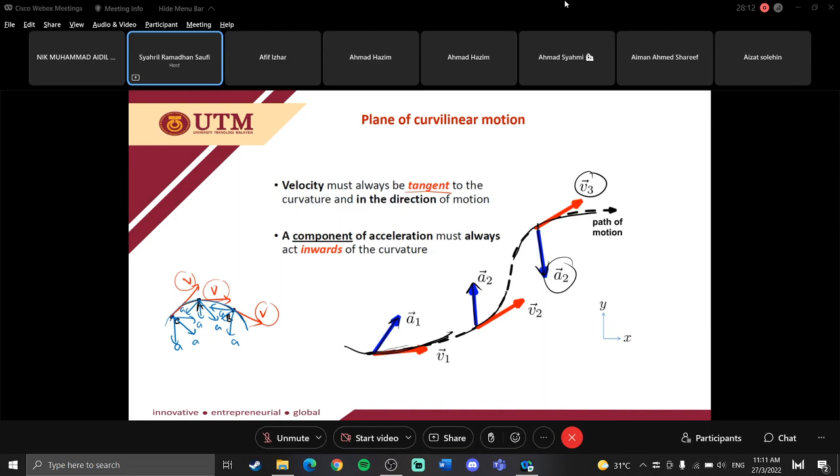All right, so in this chapter, you have three types of analysis that can be done when we have a projectile motion or a curvilinear motion. The first method is rectangular coordinates, which uses the x and y axis with respect to the reference point at the origin.

So let's say when you throw something from point A to point B. That means you have a reference point, from point A to point B, point A will be your reference point. So you will measure what is the distance, what is the velocity at A, and what is the velocity at B.

So this is the parameter you need to determine, based on the reference point. This is rectangular coordinates, x and y. Then you will have other methods called normal or tangential coordinates. For normal and tangential coordinates, we will do the analysis specifically on the particle itself, there is no reference point. The analysis involves the particle itself.

For rectangular coordinates, this is our particle, so we will refer to, for this example, the origin. Sometimes in a real case, we will refer to the initial point, let's say from point A to point B, so our reference point becomes point A. So this is for rectangular coordinates.

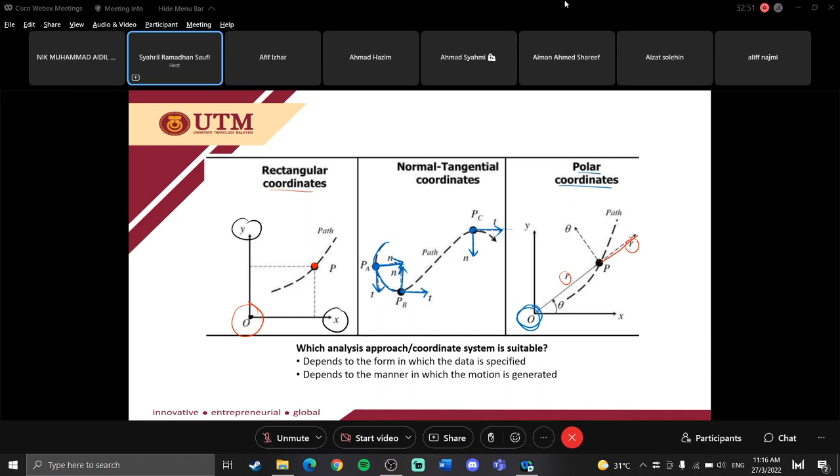So for r, this axis is always outward from this r, so this is the positive direction. Please remember, when we deal with velocity, when we deal with acceleration, these are vector parameters, so you will have magnitude and direction. That's why the direction is important.

For this r polar coordinate, you need to draw the r and theta axis based on the reference point, on the particle, but in order to draw r and theta you should refer to this reference point. For r, it is always outward. Usually in the question or problem, it will provide you what the r is from the reference point to the particle, so you know that will be your r, and you just draw the outward line to represent the positive axis of r, always outward from the particle.

And then for the next axis is theta. How to determine this theta is based on the direction. For this case, the theta is in this direction, so the positive theta axis should follow the same direction. So any parameter that follows this theta axis will become positive.

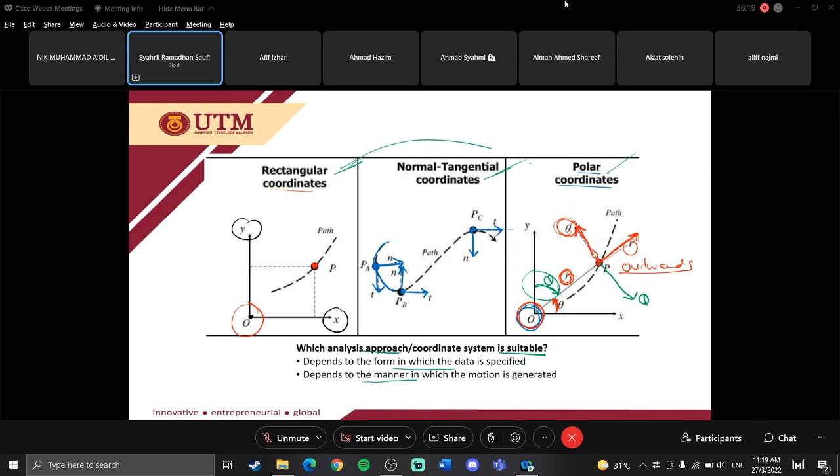This is the combination analysis. In one analysis, sometimes we combine problems, either from rectangular coordinates with normal and tangential coordinates, or a combination of rectangular with polar coordinates, or a combination of normal and tangential coordinate with polar coordinate. So in one problem you will have two analyses that you need to do, sometimes two or three together.

In rectilinear motion, you learned that velocity is a rate of change of displacement, which is ds over dt, and acceleration is a rate of change of velocity, which is dv over dt. We still refer to this displacement, velocity, and acceleration. The concept is still the same.

If we refer to this example, this is your particle at this position. For this particle, you can do x and y analysis, which has its own equations. NT analysis has another equation, and R-theta analysis has another equation. So each specific method will have its own equations that you need to understand and remember.

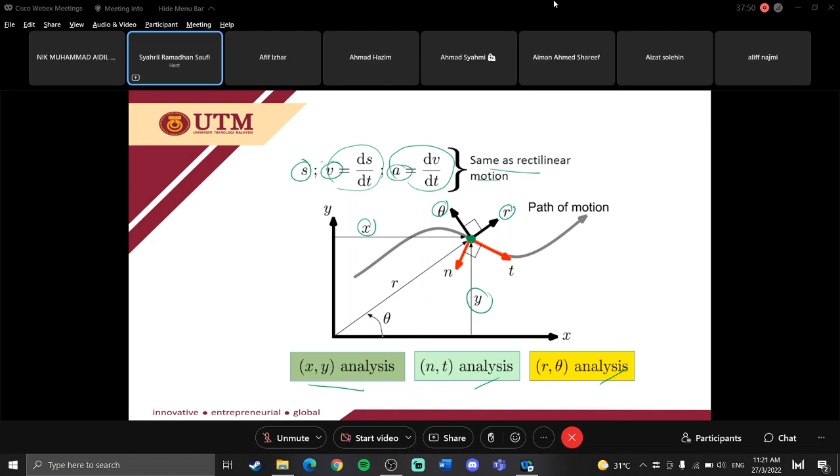If you notice here on theta and r, since the direction of theta is into this direction, the axis of theta follows the direction of this angle. This is your r, so in order to draw the axis r, just go outward from the particle. For the NT analysis, at this position, this is your curve, so tangent to the curve is your T, and inward to the curve is your N. Please remember that. This is how to determine the direction and draw the axis at the certain position of the particle.

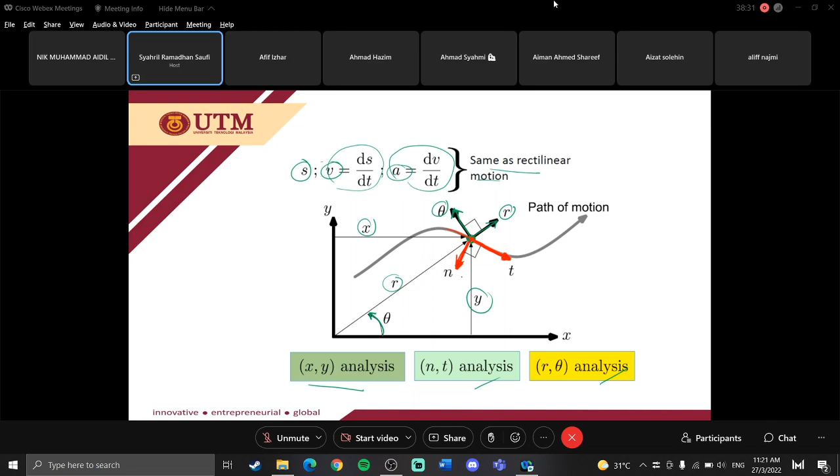So we go first on XY analysis. For XY analysis, the typical problem is a projectile, sometimes when we throw a ball from reference point A to point B, we call this a projectile. As I mentioned previously, XY analysis will have an equation along the X axis and an equation along the Y axis. I believe if you look at this equation, most of you are familiar with it, since you learned this previously in secondary school.

For the projectile problems or XY analysis, normally only gravitational acceleration g is considered. For the acceleration we only consider gravitational acceleration, so please remember that. So g is a constant acceleration along the y axis, this is the value of acceleration g. Meaning that on this particular equation for the y axis, this ay here is equal to g.

In independent analysis for x and y axis, solutions for both axes are related through time. What we can relate from the y and x axis is the time, the time taken along y and x should be the same. So when you want to do the analysis, if you want to relate the motion of the particle, you can relate y and x axis in terms of its time, so you can relate these equations together. Sometimes you need to use this equation in order to determine a parameter, let's say the displacement or velocity.

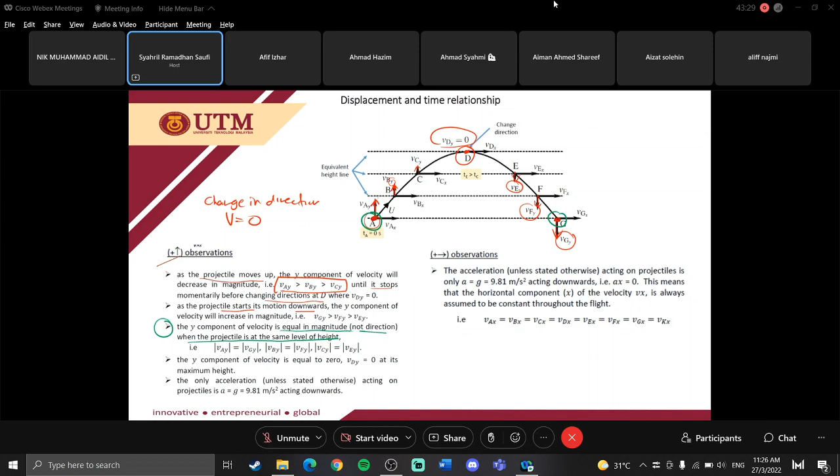So what relationship can we get here? The third point is that the y component of velocity is equal in magnitude, not direction, when the projectile is at the same level of height. What is meant here? At point A and point G, there is the same height, so VAY will be equal to VGY in magnitude, not direction. As mentioned, the magnitude of VAY equals the magnitude of VGY, that's why we put it in modulus form, because we just want the magnitude, which is the same, but not the direction.

So at this position, the velocity VBY and the velocity VFY have the same magnitude. Same goes for VCY and VEY, the magnitude is the same. You may notice that velocity VCY and VEY is the same, but the direction is different, and the time here is also different.

So there is a relationship you can make here: at the same height, there is a difference in time between two points, but the velocity magnitude is the same. You need this information when doing the analysis. Let's say at this height you have the same velocity magnitude but different time between the two points. This information is needed after this.

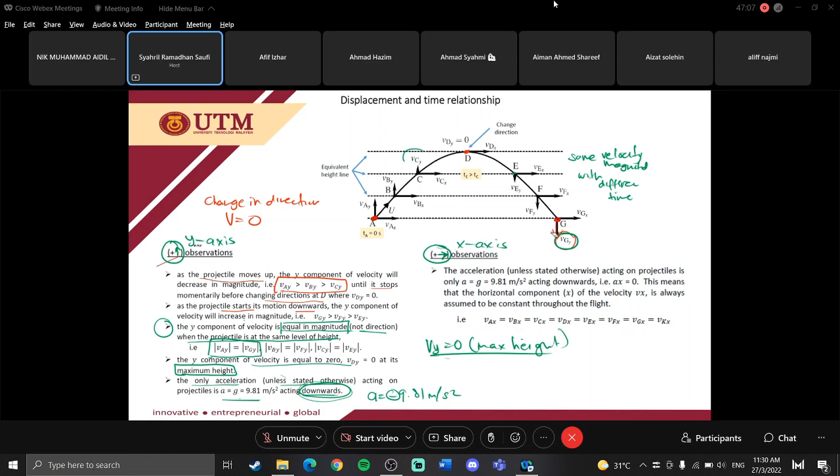Alright, so when we go along x, you will notice that VAX, VBX, VCX, VDX, VEX, VFX, and VGX are all the same. You may notice that the velocity along x is always the same from start to end. That's why, since the velocity along x is constant throughout the flight of the projectile motion, the velocity is constant.

That's why acceleration along x is 0. If you refer to this axis, there is no acceleration along the x-axis because we assume that throughout the projectile motion, the velocity is constant, so you don't have acceleration along the x-axis. The acceleration acting on the projectile is only acting downward, so ax is equal to 0. This means the horizontal component of velocity vx is always assumed to be constant throughout the flight.

So this is the information you need when you deal with projectile motion. This is the information that you need to understand. So any questions so far?

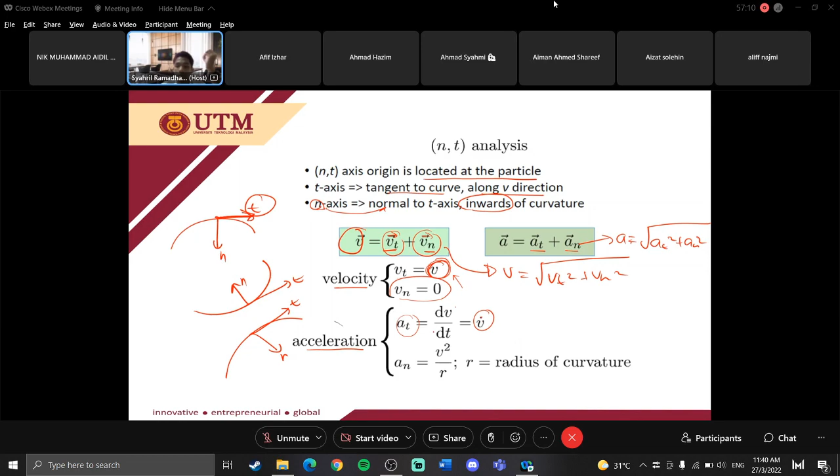Then there's another acceleration related to the normal axis, which is the normal acceleration. This normal acceleration is also related to v, but with the radius of curvature. Because normal refers to the curvature shape and is always inward, you need to consider the radius of curvature along with the velocity.

You know that velocity is in meters per second, so velocity squared gives meters squared per second squared. Since the normal acceleration is velocity squared over radius of curvature, and radius is in meters, you get meters squared per second squared per meter — you cancel out one meter, leaving meters per second squared, which is the unit of acceleration.

So usually you can check whether it makes sense in terms of its unit. Here you get the unit meters per second squared.

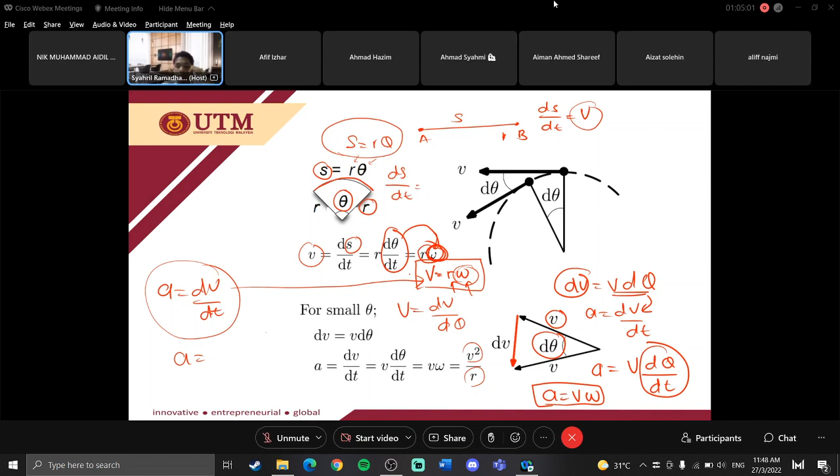So then we know that A is equal to dv over dt. We substitute dv, this v d theta, into this equation. So we have A equal to v d theta over dt. D theta over dt is actually omega. So A is equal to v omega. This is the relationship you obtain. So since v equal to r omega, omega is equal to v over r. You substitute omega into this equation, then you get A is equal to v times v over r, that's why you get this equation, v squared over r.

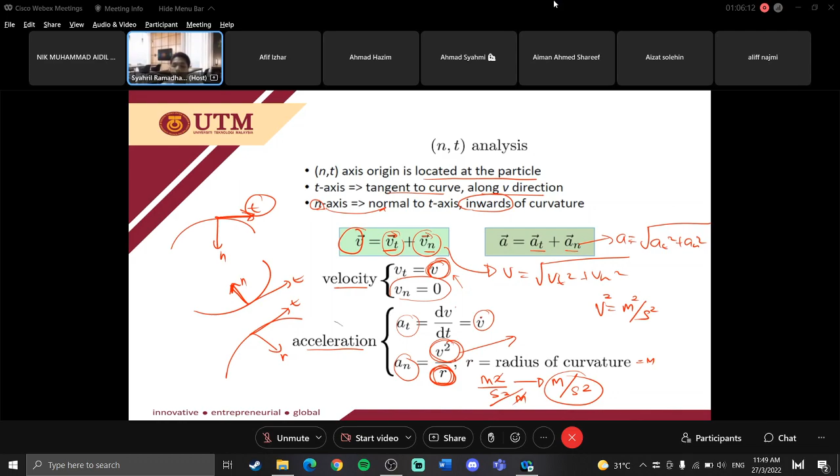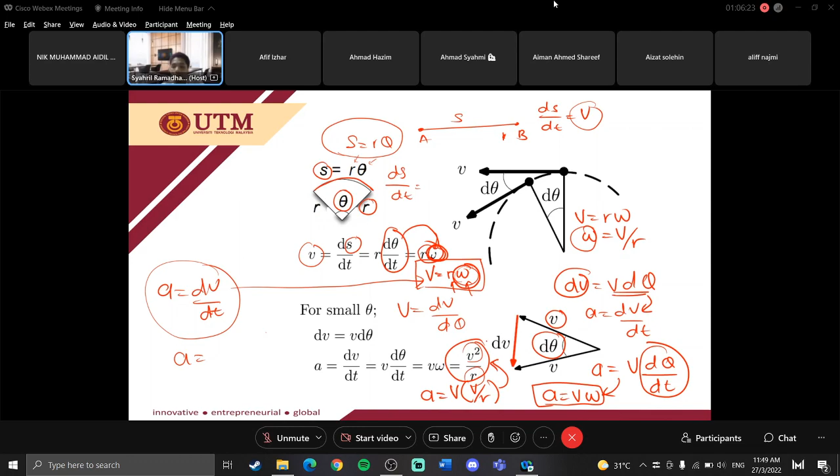This is the equation of normal acceleration. You can refer to this slide for how to get v squared over r — the derivation of velocity and acceleration when the particle moves in curvilinear motion. But the derivation is not included in your test. You just need to remember the equations: vt equal to v, vn equal to 0, at equal to dv over dt, and an equal to v squared over r. So in a question or problem, you need to understand only this equation. I just provided the extra knowledge on how to get the acceleration when the particle moves in curvilinear motion.

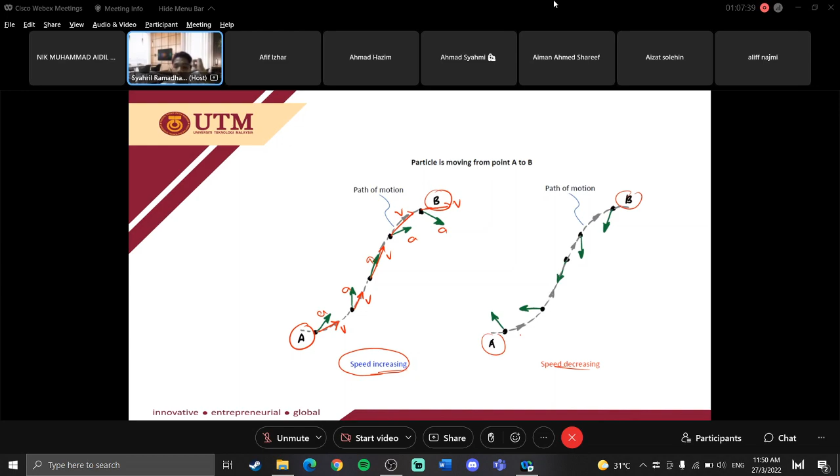Okay, for the speed decreasing, you have A to B. This is the direction of motion, V. You may notice that the acceleration is in the opposite direction, preferring the opposite direction of the motion. So we can say that the speed is decreasing, or deceleration.

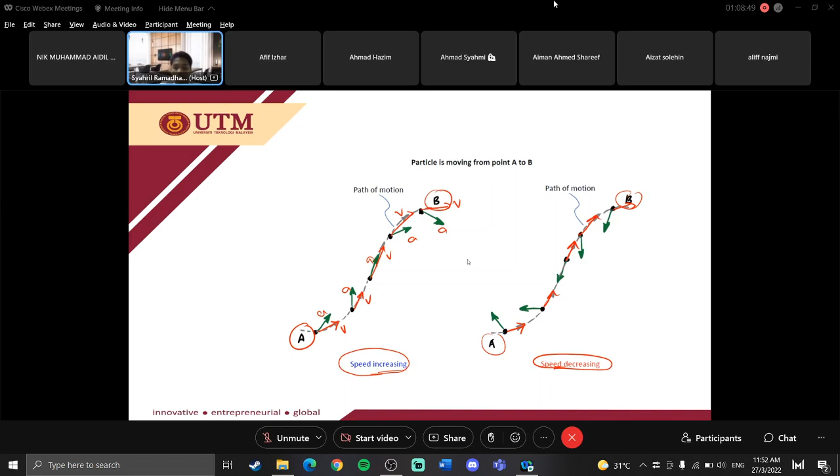Let's say when you're watching a bird moving in the sky, flying in the sky, you yourself are the reference point, and you're looking to the bird. So the distance from you to the bird is your r, and the motion of the bird is based on this theta direction. If you look from x to this r, then your positive axis should be this direction, and the positive axis for r should always be outward from this point, sentiasa terkeluar daripada particle, for positive direction.

So for R and theta analysis, you will have another set of parameters: V theta, VR, A theta, AR, that need to be defined.

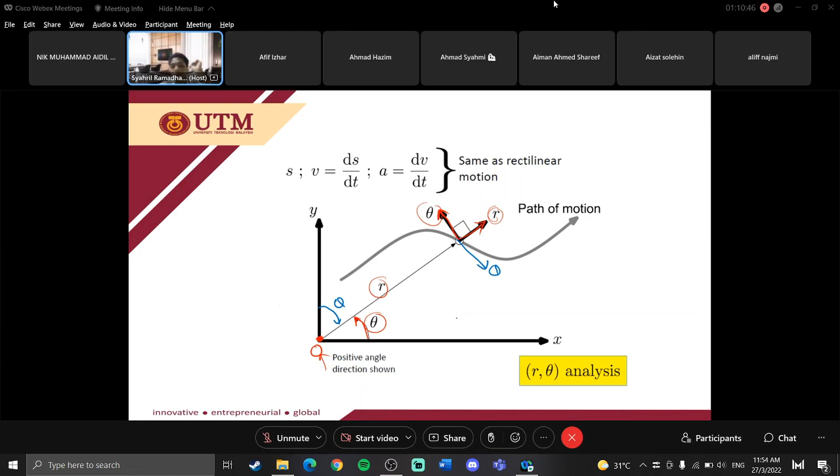As I mentioned previously, if theta is given like this, then this should be the direction, so the positive theta axis should be this direction. Please make sure when you draw the axis you follow the correct direction, because it will represent the positive and negative direction of the velocity and acceleration.

Alright, so this is the equation that you need to remember for r theta analysis. The r theta axis has its origin located somewhere from the particle, and the r axis goes from origin in the radial direction to the particle, with theta normal to the r axis, positive along positive theta. What is meant by normal to r axis is that r and theta are always perpendicular, just like n and t axis are always perpendicular at 90 degrees, and x and y axis are always perpendicular at 90 degrees.

So for velocity, you can determine the velocity of the particle by using Vr plus V theta. Please remember, this is a vector, you cannot add it up directly. You need to use vector analysis: Vr squared plus V theta squared, square root, then you will get V.

Same goes for acceleration. Acceleration can be found using Ar plus A theta: ar squared plus a theta squared, square root, then you get the total acceleration a. So vr is equal to r dot, v theta is equal to r theta dot, ar is equal to r double dot minus r theta dot squared, and a theta is equal to r theta double dot plus 2 r dot theta dot.

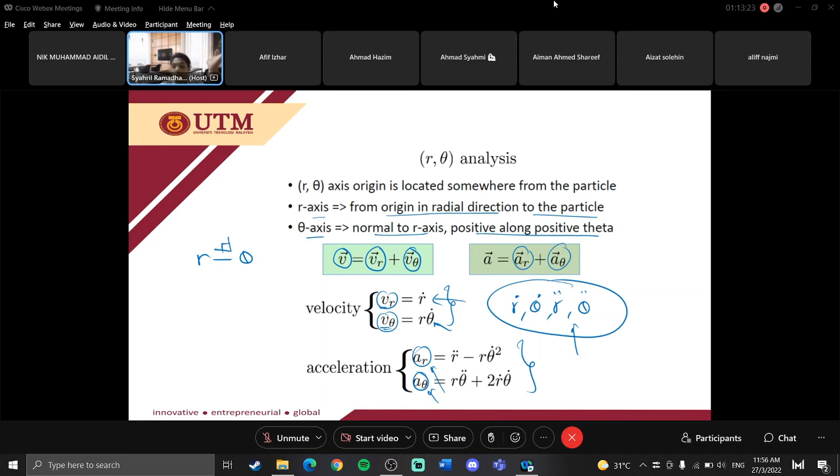Okay, so that's all for the information for this chapter. Then we can move on to the examples and exercises. So for now, any question? Ada soalan ke?

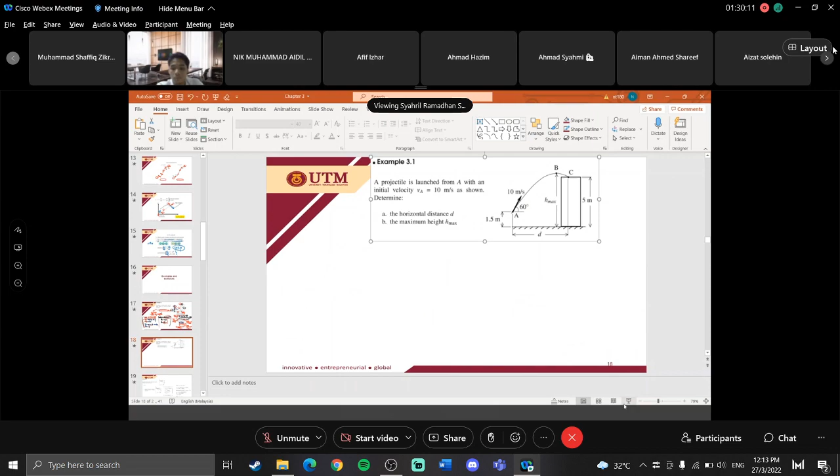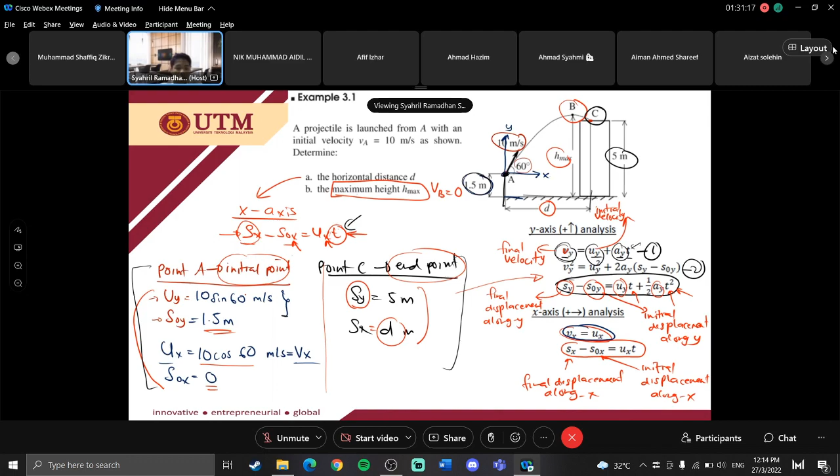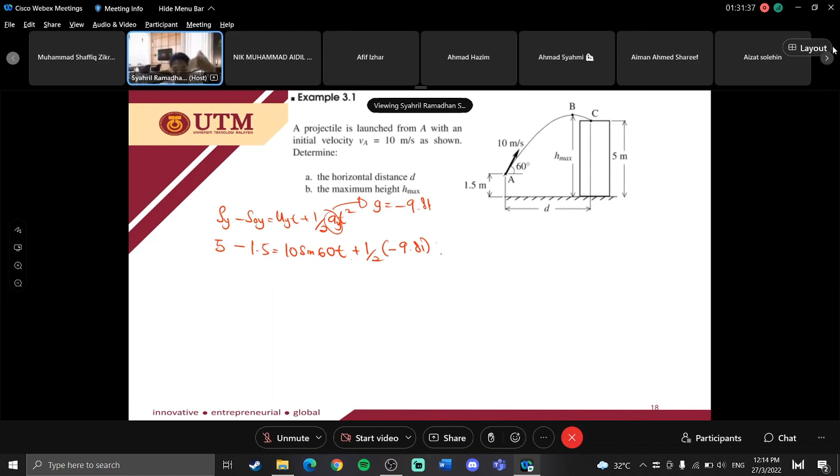So let me write the equation: Sy minus S naught y equals Uy t plus half a t squared. Sy is 5, S naught y is 1.5, equal to Uy which is 10 sine 60, times t, plus half times Ay — which is actually g, and since g is directed downward, it's negative 9.81 — times t squared.

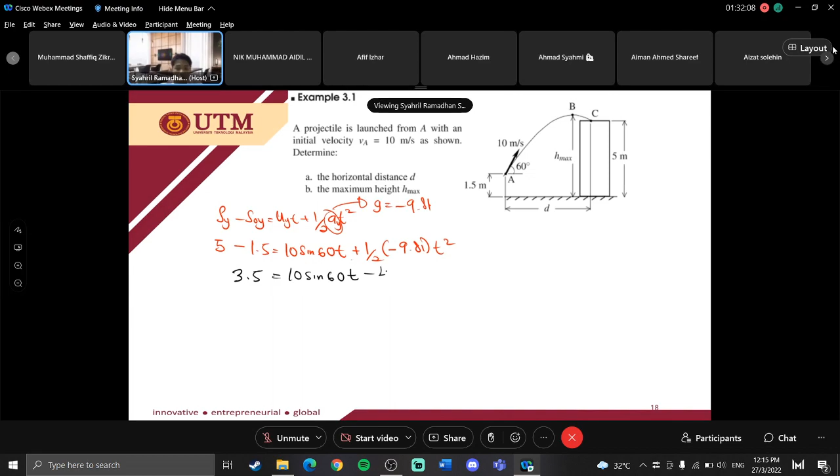So this is the equation that you need to use to determine the time. You have 3.5 equals 10 sine 60 t minus 4.905 t squared. Rearranging this equation, you get 4.905 t squared minus 10 sine 60 t plus 3.5 equals 0. So you have this quadratic equation, and from it you can determine the times t1 and t2.

Alright, so let me copy the solution from the books first.

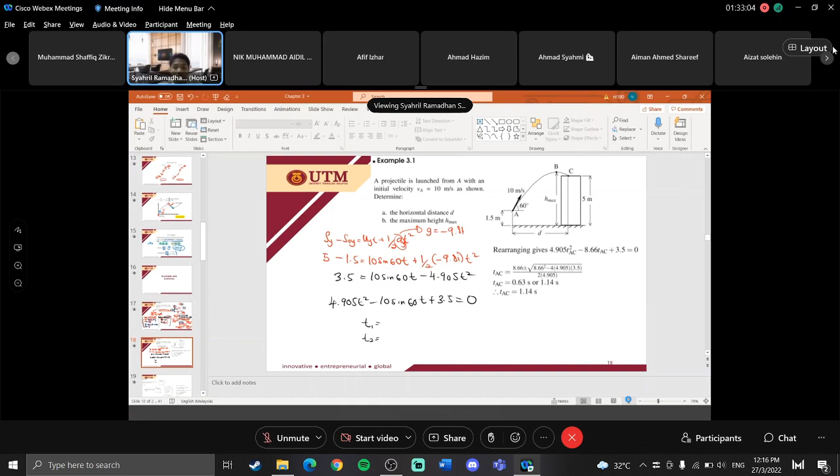Okay, for those not familiar with the quadratic equation, you can refer to this solution. For those who know how to use the calculator, you can use the calculator and directly get the time. You click mode, then equation, then 2nd degree.

As from the books, it uses this solution. You rearrange the equation and put it in this formula. You will get the time 0.63 and 1.14 seconds. So you get two positive values for the time.

So the question asks the horizontal distance, meaning the distance at point C, from point A to point C. So my question is, why in the book do they choose 1.14 seconds?

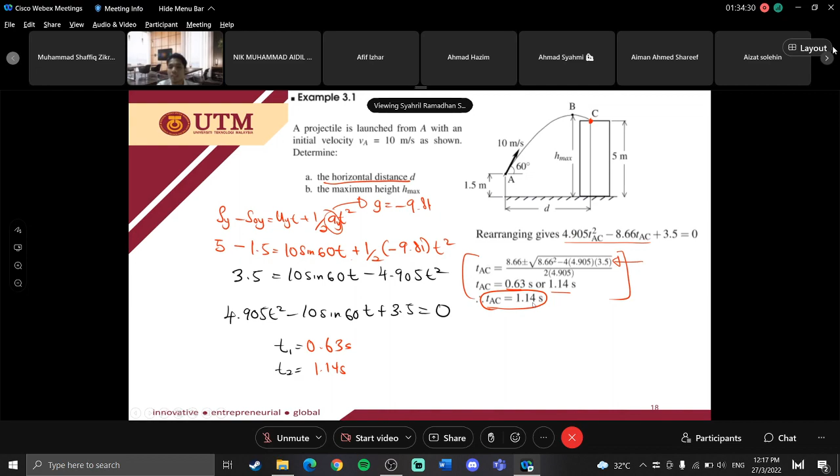Anyone want to try? Why do they choose 1.14 seconds? Because it's the time at C, sir. Because the time at... So 0.63, where is the location? Is it because it is at the same height, sir? Same height?

Oh, okay, I think I understand your answer. If you are at this point, there is another point on the same height as C. So if I extend the line from this point, this is the other point that has the same height as C. Let's call it point D. So point D and point C are actually the same height.

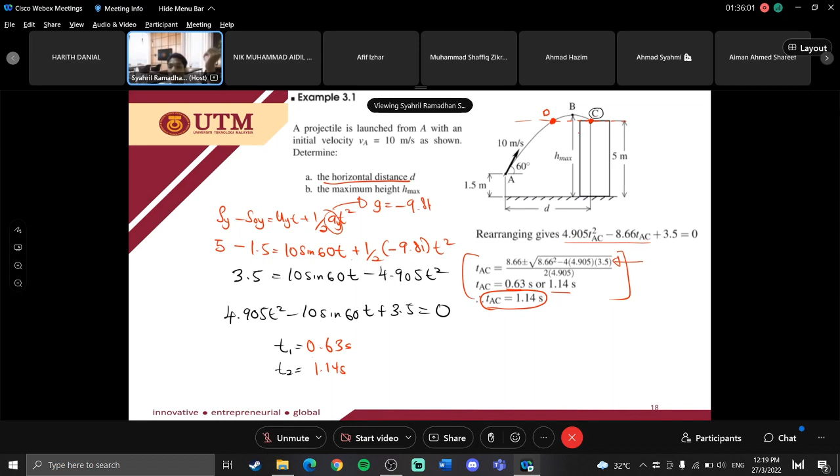Same height means the same velocity magnitude, but a different time, since same height but different location gives a different time. So that's why here you have 0.63 and 1.14. You have a curve like this, where point D is at 0.63 and point C is at 1.14 seconds. This is the implication of the times I mentioned previously.

If you notice, when the point passes the maximum height, you need to choose the higher time. If the point is less than the maximum height, you choose the lower time. This is based on the curve I showed on the displacement-time relationship.

So now you know that at point C, the time is 1.14 seconds. So you have the x-axis equation: Sx minus S naught x equals uxt. This is the x-axis equation because we want the horizontal distance, which is based on the x-axis. Sx is unknown, S naught x is 0, so Sx equals ux times t, where ux is 10 cos 60, times the time, which is 1.14 seconds. Then you get the distance.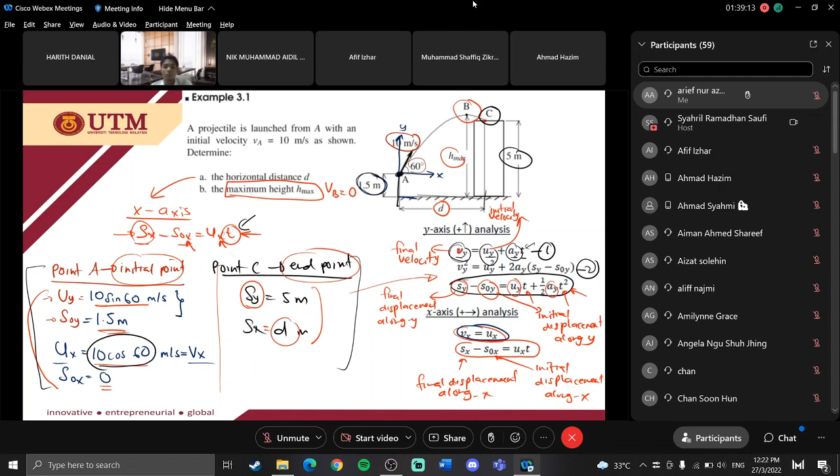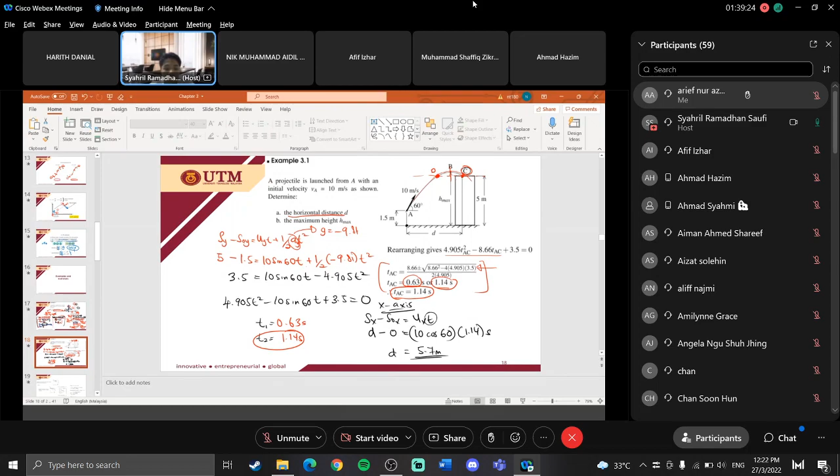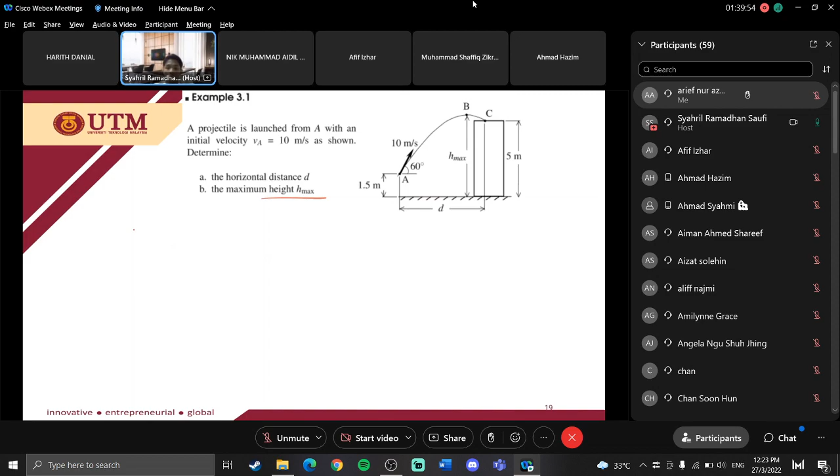Okay, so then we go on to question B. I think I need an extra space. All right, so we go on to question B now. The question asks for Hmax, which is along Y. So since it's along Y, you need to use the equation along Y. Let me copy this one.

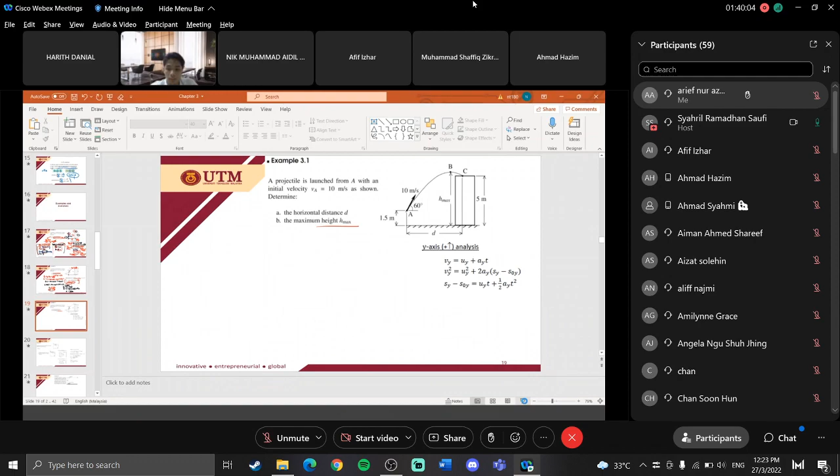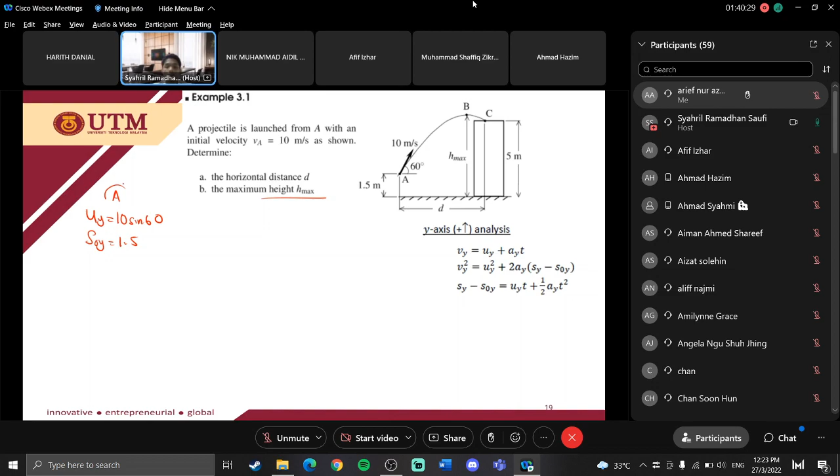Right, this is the equation along Y. So you have Uy equal to 10 sine 60, and S naught Y equal to 1.5. This is for the initial point A. Now, since question B asks for maximum height at point B, point B will become your endpoint, while this is the initial point. Since it's maximum height, you know Vy at point B should be equal to 0.

Anyone? No, sir. Why? Because we can use equation 2. We don't need the time. Yes, correct, we can use equation number 2 because we don't need the time. We have the equation of Sy and S naught Y, and Ay we know because it's constant, and Uy squared we know, Vy squared is 0, so you can use this equation.

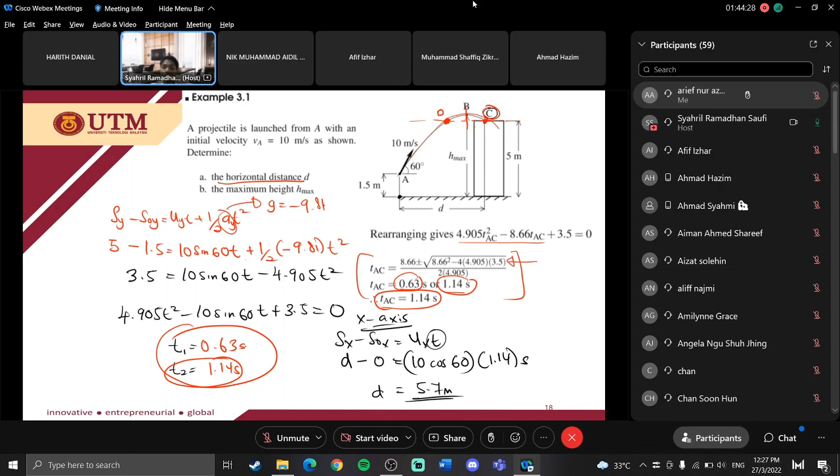If you can relate, usually we need to determine the time. One important thing here is when you get the time, you will get two times, t1 and t2, so which time do you need to use. Usually for the projectile it's just like that, playing around with this kind of equation. I think that's it for example 3.1.

So I want to go with example 3.2. You may notice that in this example, point A starts above point B. So referring back to the previous slide on the implication of time, you may notice that if you have information like this, when you calculate the time, you will get one positive time and one negative time. So you need to choose the positive one.

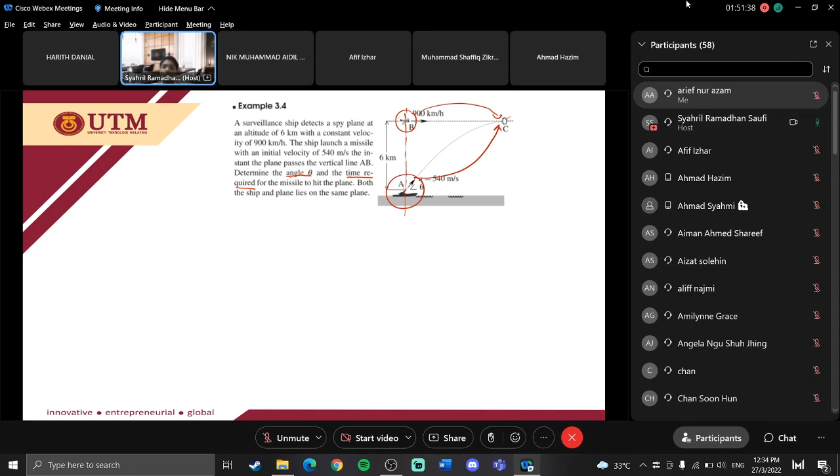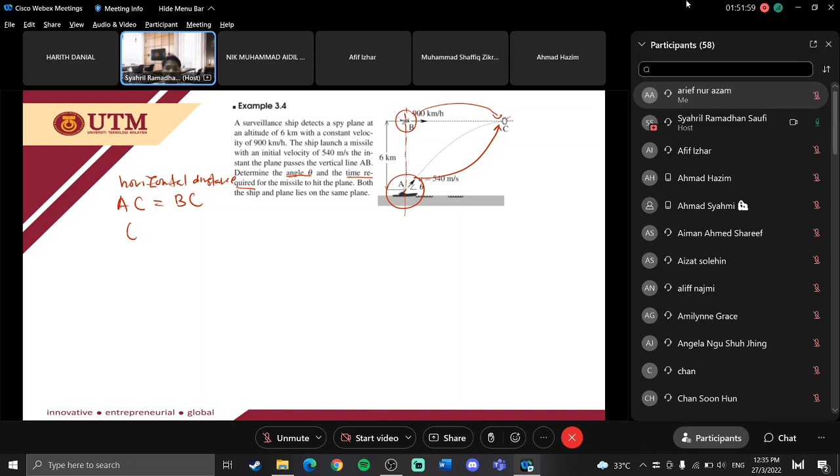So the horizontal component distance should be the same, and the time for the plane and the missile to reach point C will be the same. So A to C is equal to B to C for horizontal distance, and time A to C is equal to time B to C. So this is the relationship on how the missile can hit the plane.

Okay, let me copy the equation first. This one is for y, this one is for x.

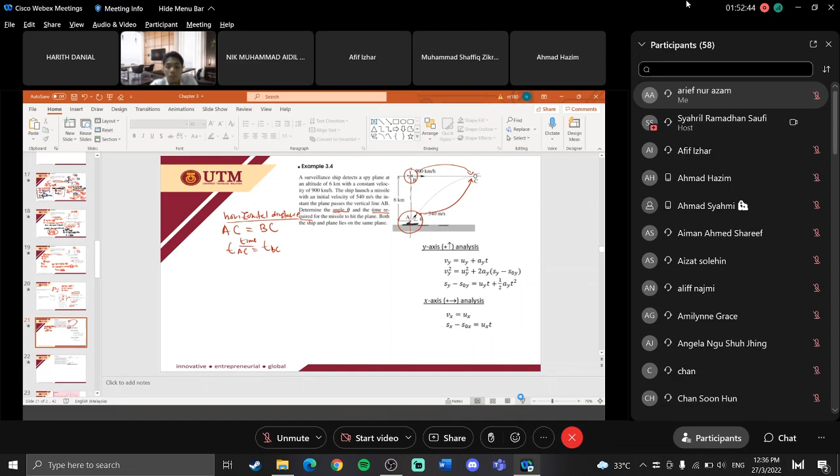So now you have the equation for horizontal distance. Let's list all the information that we have. So for the ship...

uy is equal to 540 sine theta, and ux is equal to 540 cos theta. So let's say here I put usx, usy for the ship. And then for the plane, I have upy and upx.

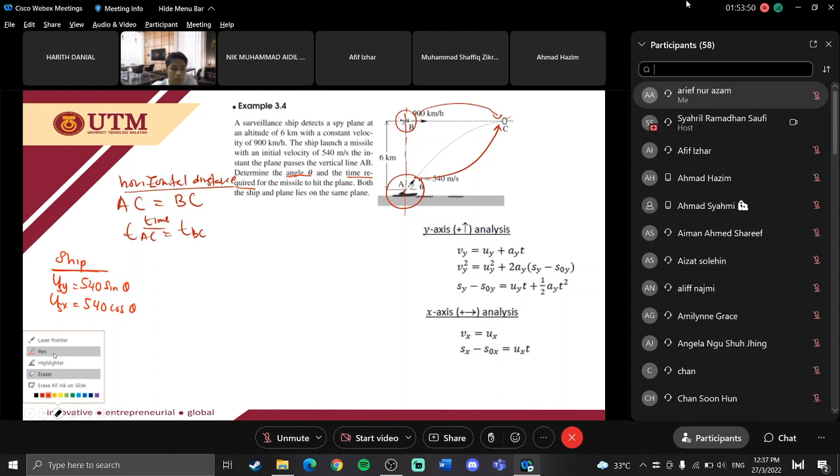So we only have upx, which is 900 kilometers per hour. So for this plane, we have only one axis, the x-axis only, so no direction on y for the velocity. But it's given as 900 kilometers per hour, so you need to make the unit consistent.

So you can simplify this, changing the unit to meters per second. You have 900 kilometers per hour, so you need to multiply by: 1 hour is equal to 3,600 seconds, times meter, 1,000 meters per kilometer. You can cancel out the hour, kilometer and kilometer, and you will get 900 times 1,000 over 3,600. So this is how you change the unit from kilometers per hour to meters per second.

Then you get 250 meters per second. So UPX is 250 meters per second, this is the initial velocity of the plane.

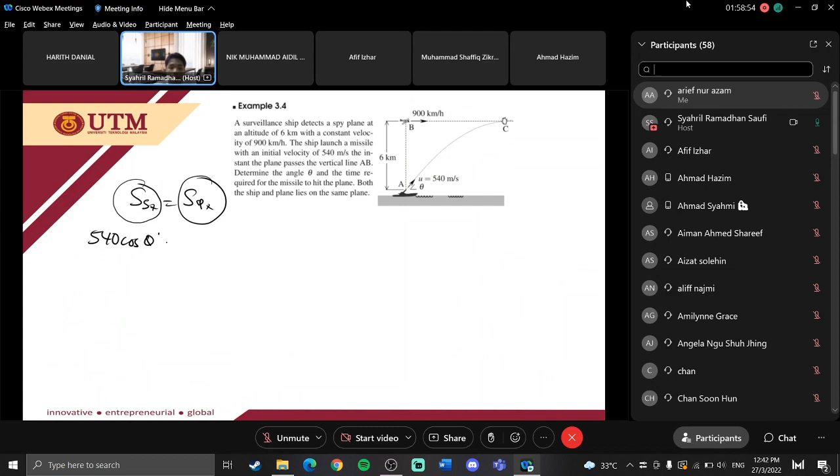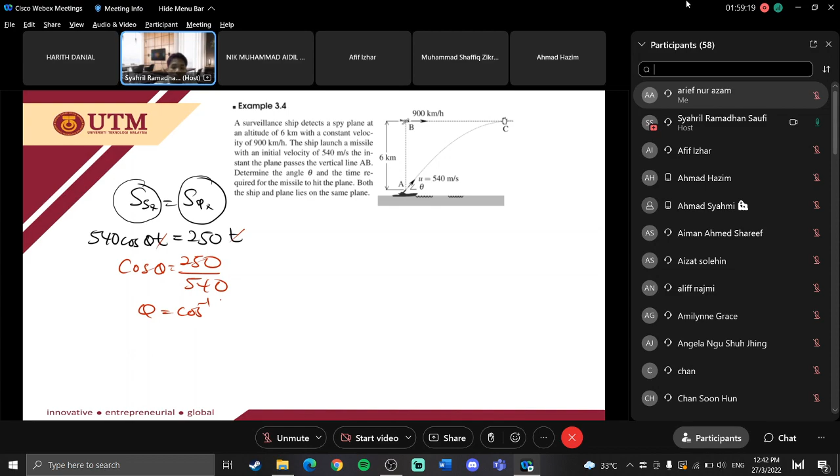Equation 1 and equation 2, you equate both, which is 540 cos theta t equal to 250 t, because the horizontal distance is the same, from point A to C and B to C. So you can cancel out this t, and then you get cos theta equal to 250 over 540, and theta equal to cos inverse of 250 over 540. Then you get your theta.

So then what you need to determine is the time required for the missile to hit the plane. So you need the information of the times. The time required for the missile to hit the plane, so the time B to C and A to C is the same.

So you have here UY for this worksheet. UY is equal to 540 sine theta. And then you have Vy which is unknown, and Ay is equal to negative 9.81. And then you have S naught Y, so S naught Y is 0.

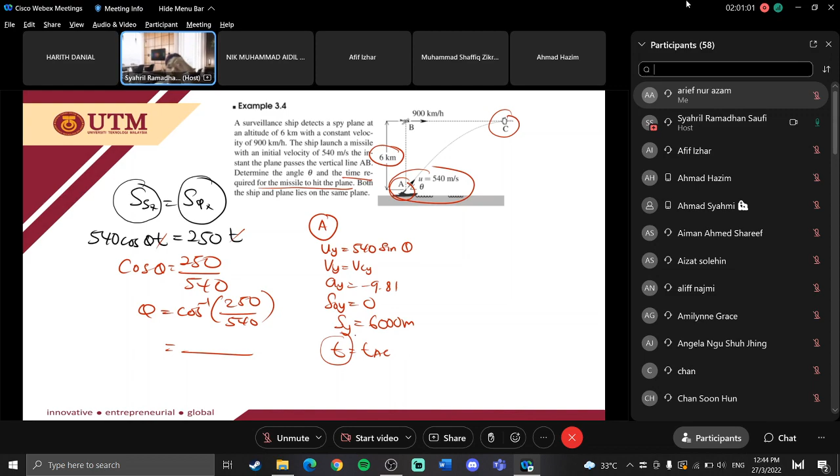And you're given here the SY from A to C, which is 6,000 meters. So the reference point here is A, the end point here is C, so you just put positive 6,000 meters. So the time is unknown, you need to know what would be this time.

So from here, since we know Uy, Ay, S naught y and Sy, then we can use the equation with Sy, S naught y, Uy and Ay, so we just leave the unknown t.

Sy minus S naught y equal to Uyt plus half Ayt squared. So Sy is 6,000 minus 0. Uy is, so from the books, what would be theta here? Theta 62.4, so 540 sine 62.4 plus half negative 9.81 t squared. So here you have t.

You can refer to this example. The answer is t equal to 14.78 seconds, and t2 you have 82.78 seconds. So you have two times here.

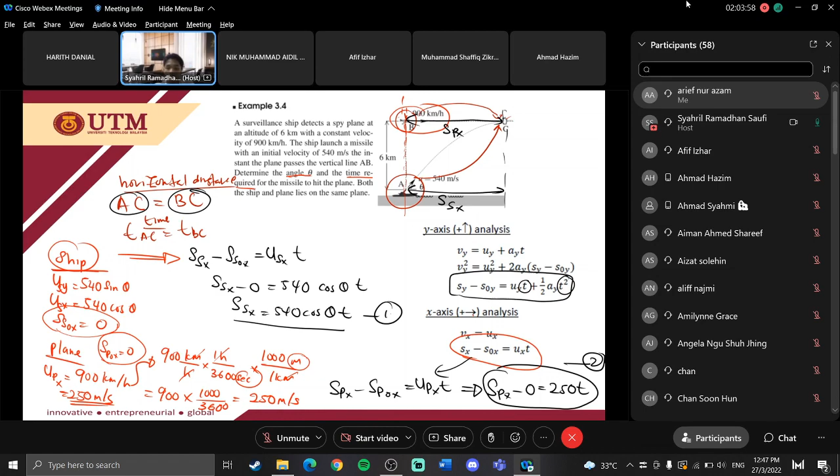So for this kind of example, if you have additional information and want to use another equation, make sure you have enough information to use it. You will get the same answer. Any questions so far?

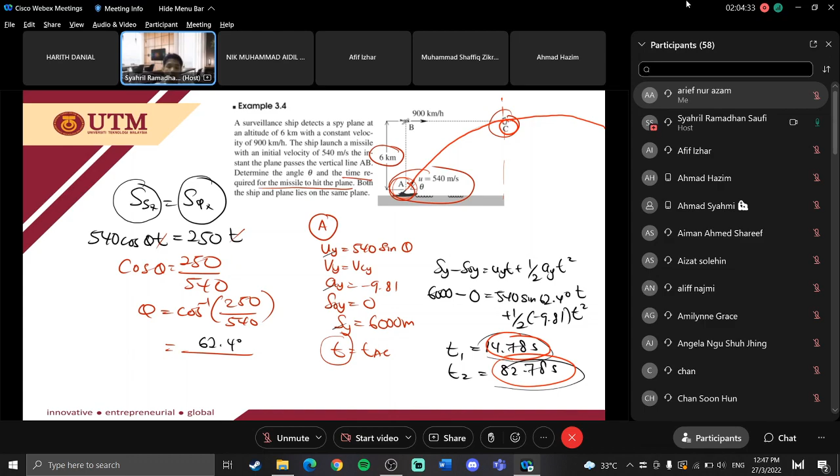No, sir. So we go on to one exercise, after that we will end this class. We are already at almost 12:50, so we just do this one exercise, then we will end this class.

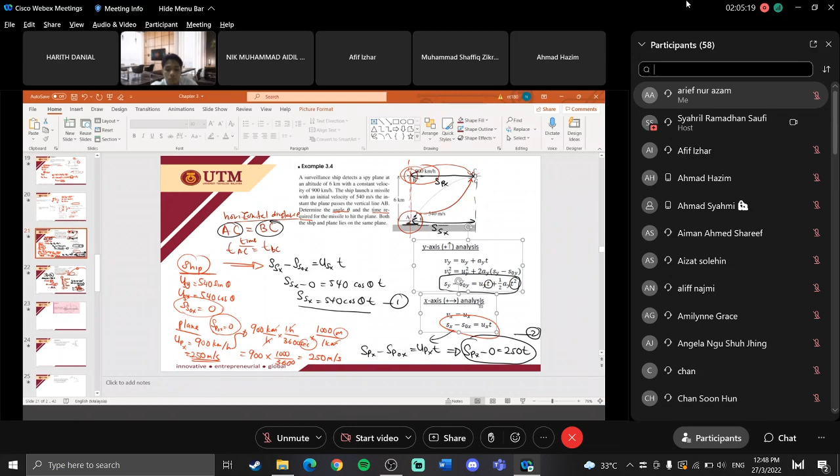Alright, so when we talk about the horizontal distance, this should be the equation: Sx minus S naught x equal to u times t. So if you want to use this equation, you need to have the time. But for this exercise, you don't have the time, so you need to determine what that time would be.

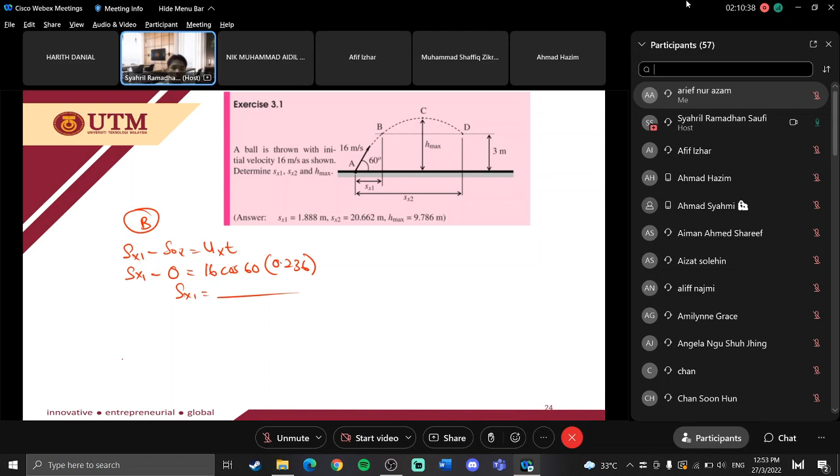Then you go for point D. So for point D, Sx2 minus S naught x equal to Uxt. So Sx2 is unknown, 0, 16 cos 60, and the time here, 2.589. Then you get Sx2 in terms of meter.

Then Hmax, you need to determine Hmax, at point C. So Vcy equal to 0. In order to get the Hmax, you have Vy squared equal to Uy squared plus 2ay times Sy minus S naught y.

So this Sy is actually your Hmax, and your S naught y is 0. So Vy squared, 0, equals Uy squared, 16 sine 60 squared, plus 2 times negative 9.81 times Hmax minus 0. Then you will get your Hmax in terms of meter.

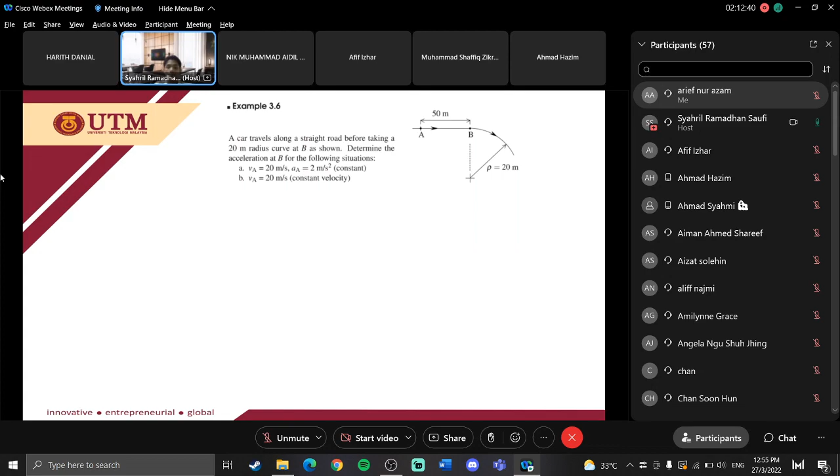So that's it for this exercise. We will continue on the next class for other exercises, examples and also other exercises. So far, any question? Any questions before we end the class?

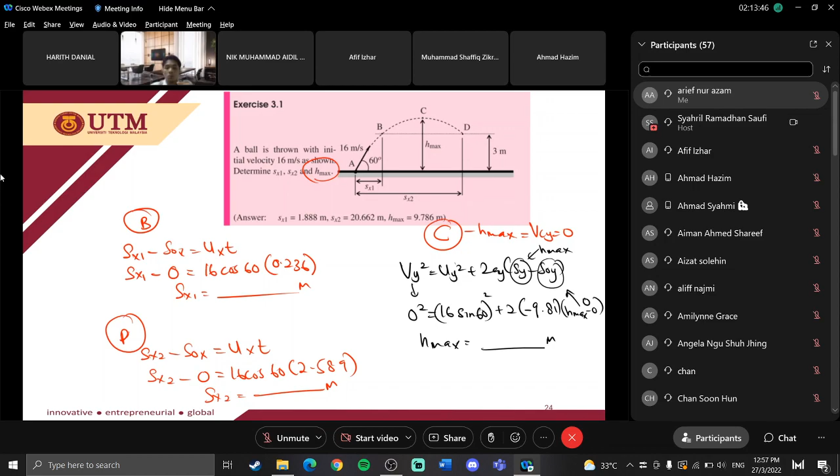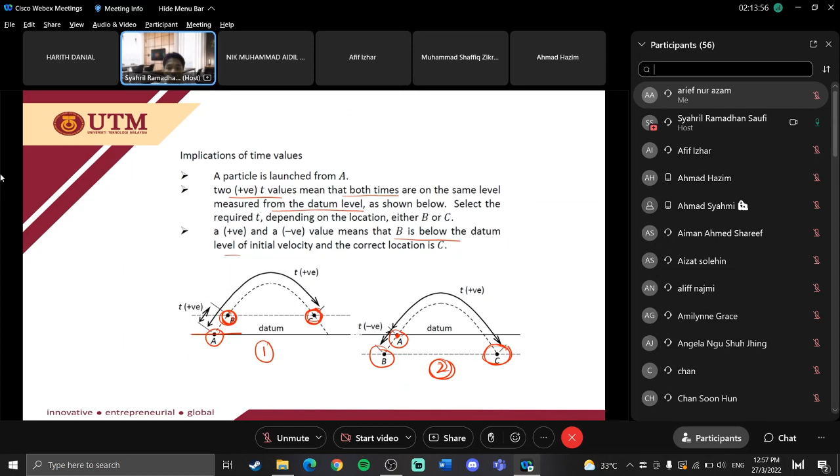Thank you, sir. Thank you, sir. Thank you, Doctor. Doctor. Thank you, Doctor. Thank you, Raka. Thank you, Doctor.